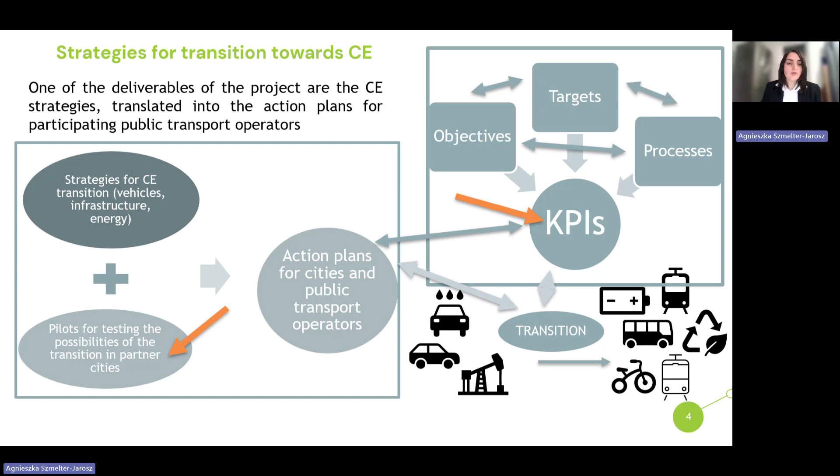However, that's not the case of our pilot specifically, so I will jump into the next part. We wanted to analyze a transport corridor, and in our case, in PKA Gdynia, there was only one operator operating within this transport corridor.

However, we have a few public transport operators in Gdynia. That is why we wanted to analyze if only one transport mode would be the best solution for a specific transport corridor or not. Regarding our other activities within the project, you may see on the slide that we had lots of different KPIs or data to be analyzed.

We analyzed data for the transport corridor operator, urban transport system, and the city itself. However, our pilot was focused only on the transport corridor and public transport operator, which was PKA Gdynia, but we also wanted to analyze other scenarios.

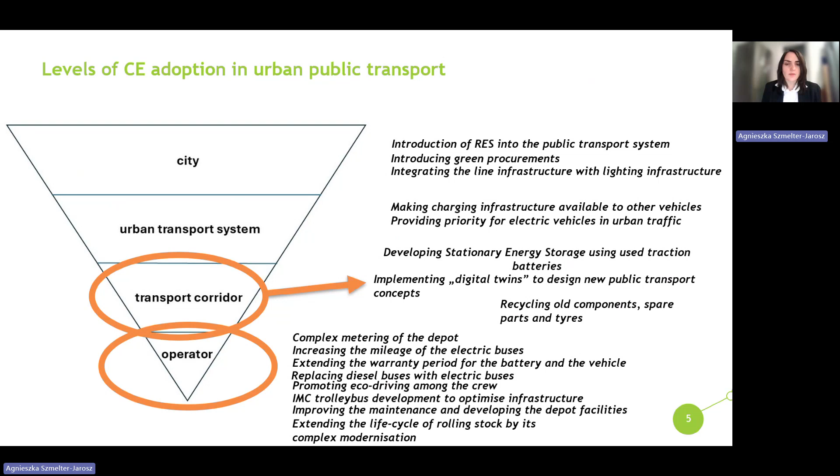We wanted to see if maybe another public transport operator could be engaged in operating within this transport corridor. Regarding public transport in Gdynia, there are some specific features for Gdynia as a city.

We have trolley buses in Gdynia in operation since 1943, and it's one of the oldest trolley bus systems in Europe. Also, we electrified some routes and the electrification process is ongoing since 2022. And also we wondered if we should electrify more routes or not, or if the trolley bus, in-motion charged bus or diesel bus would be the best solution for some routes we wanted to change and wanted to develop.

So to sum up the features for public transport in Gdynia, you can see on the slide that we have e-buses, we have trolley buses, and combustion engine buses, which are dominating right now, but we are trying to change that regarding our goals for electrification of public transport. And also, of course, they are aligned to European Commission requirements.

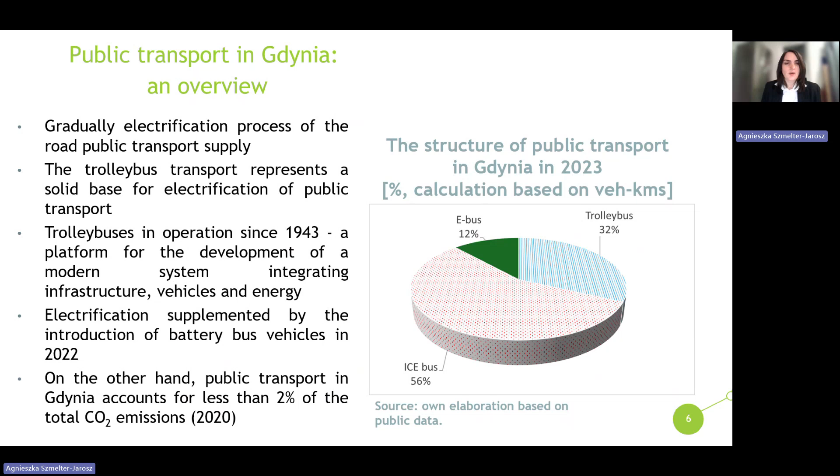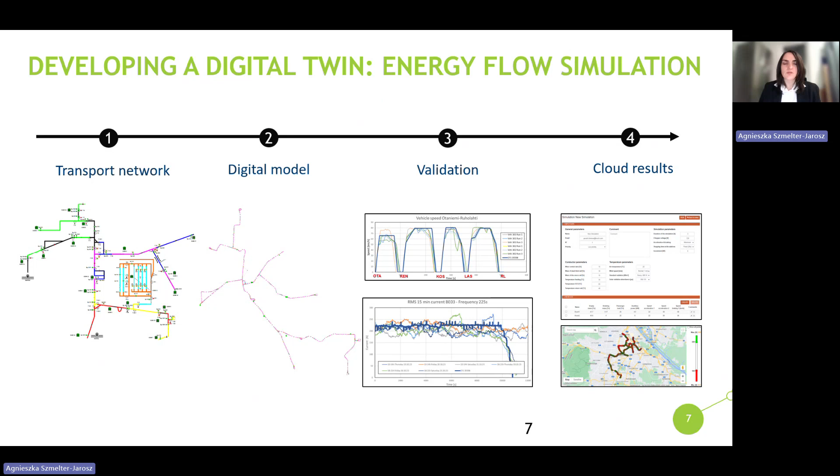So we developed the digital model, and then we validated different scenarios for the transport corridor planning, let's say, what kind of transport modes should be implemented within this transport corridor. And then, after analyzing really a big number of scenarios, we concluded what would be the best solution for particular routes within this transport corridor, since within this corridor PKA is operating a few separate routes. So energy flow simulation was made for the transport corridor, the Western Corridor, we called it. And you can see on the slide what was the part of the transport network which was under analysis.

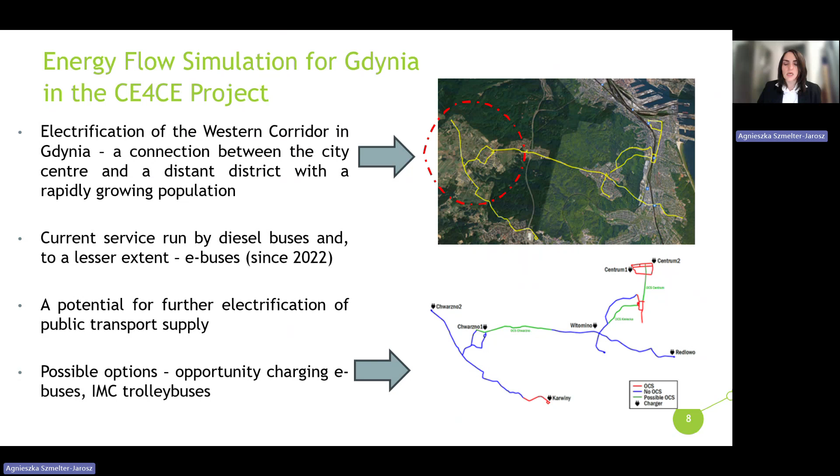As you can see as well, current service is run by diesel buses and to a lesser extent electric buses, and we wanted to see if we should develop it in some way, especially if in-motion charged buses are a sensible solution for this transport corridor, or we should mix it with diesel buses and electric buses in some combination, let's say. So the pilot started as the project started. In September 2023, a few months after starting the CE4CE project, we defined a collaborative framework, and also we determined what should be under analysis.

Then we narrowed it down to just the Western Corridor, as I said, since we wanted to make the pilot for just a selected few lines, few routes, and you can see these bus lines here on the slide. Later on, when these lines were selected, we developed the digital twin for the selected corridor and the routes within this corridor, and we analyzed, as I said, over 200 scenarios for changing this transport corridor in different variations. And also we analyzed scenarios for no traffic, high traffic, but these were only a few variables we wanted to incorporate in this analysis. So we analyzed many options, and you can see the main results on the bottom of the slide.

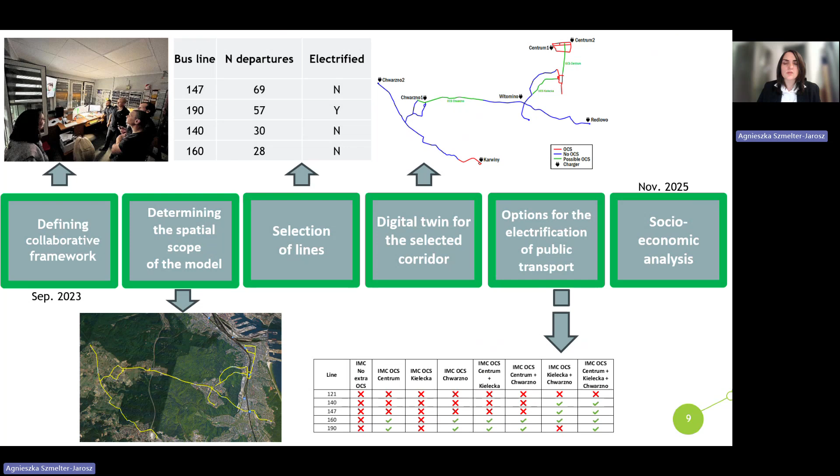And the last part of the analysis is socioeconomic analysis, which we are ending right now, also using a hackathon with students and experts to help us validate the pilot results, because of course the pilot results are very reliable, but as you know, we have to also incorporate some socioeconomic analysis to validate these results, if they are sensible in our situation or not.

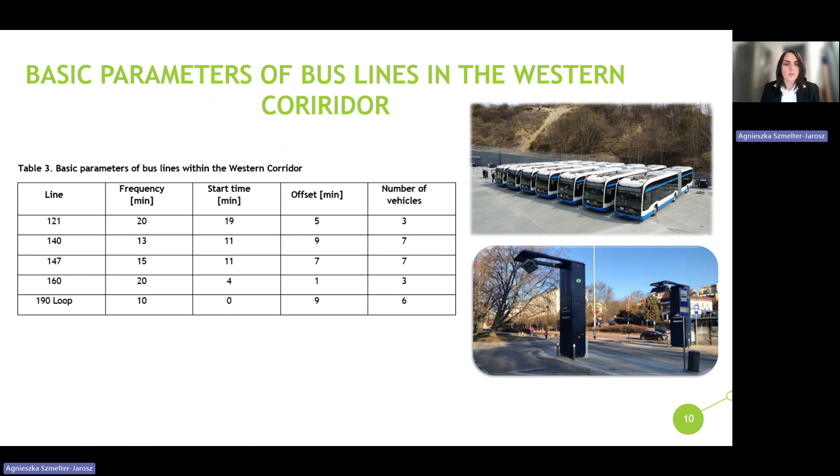We analyzed these few routes for the Western Corridor, including their frequency, start time, offset, number of vehicles operating, but also within the different scenarios we developed, we changed numbers from this very primary table in order to see if something will change or not regarding the real-life data we had at the very beginning of our pilot. So we assumed that some variables will have some specific values.

As you can see on the slide, this is just some assumption we made within our analysis. However, as I said, many scenarios were developed, and for sure we will deliver also a scientific publication regarding the results and summing up the results for this very vast analysis.

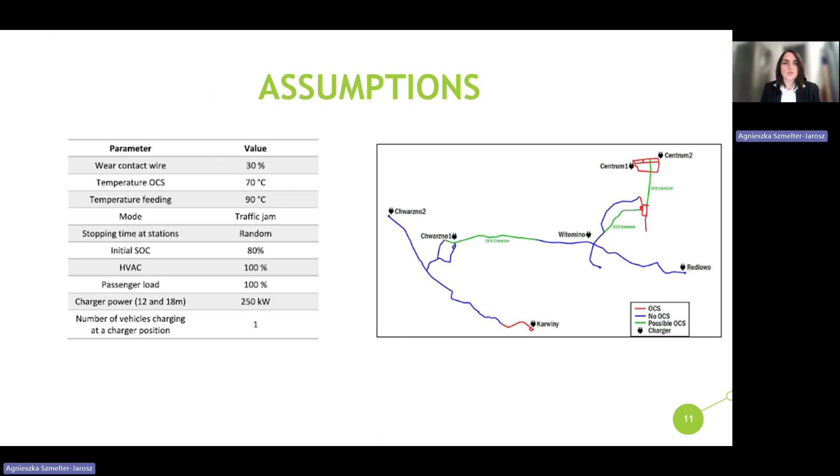So we assumed some values for parameters such as contact wire, temperatures, modes, stopping times at stations, what was the passenger load, charger power, and number of vehicles charging at the charger positions. Also, we analyzed the current situation of charging stations within the city, and also, of course, potential situations, so situating new chargers within some locations within the Western Corridor.

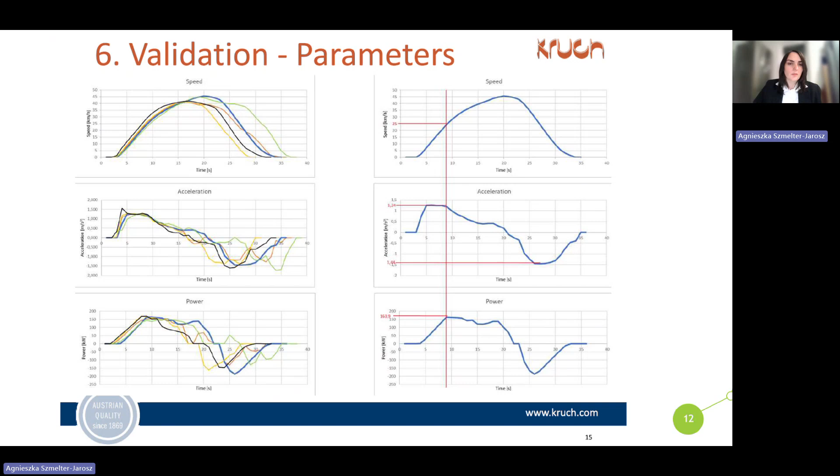On this slide, you can see a part of the final analysis of our partner, Kruch Railway Innovations. This was only a part of the analysis for different scenarios, and for some situations we assumed traffic or no traffic, with frequency of 7 minutes or 15 minutes of operating on specific routes. So we had to analyze a few types of charging and few types of vehicles operating on specific routes.

So we had to analyze the situation for batteries, so how often we should change batteries within some lifetime of the vehicle. We analyzed battery costs and battery lifetime, battery degradation regarding stationary charging, opportunity charging, in motion charging, overnight charging, etc. So we had to analyze lots of different scenarios and combinations of vehicles on specific routes.

Also, we had to analyze the situation regarding frequency of using vehicles and frequency of operating on specific routes for these few lines I mentioned before, and you could see on the slide. So we had some trade-off appearing in here, comparing costs of infrastructure and costs of batteries and vehicles and energy. You will see on the further slides some results for this analysis.

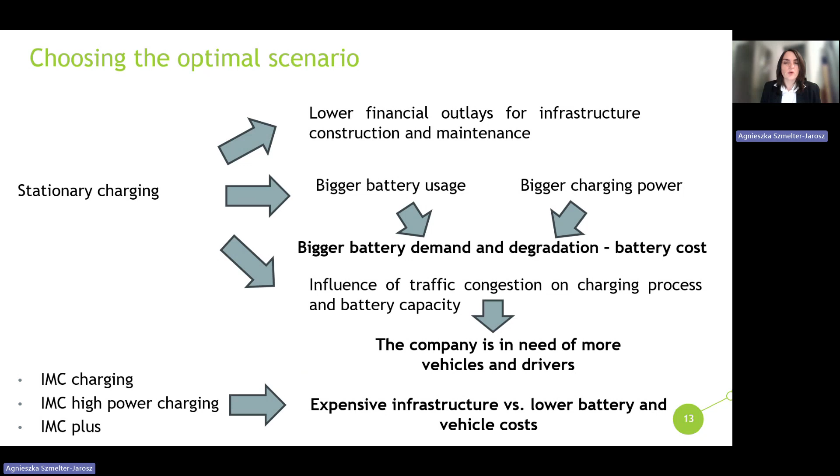It is one of the most probable scenarios we analyzed within our pilot, because we know that the congestion is appearing specifically in some hours within the daily cycle of operating on specific routes, especially mornings and afternoon. So we wanted to analyze a scenario very similar to reality. That is why 7 minutes frequency and congestion was one of the most probable ones we wanted to analyze and incorporate in the final results presented in our deliverables.

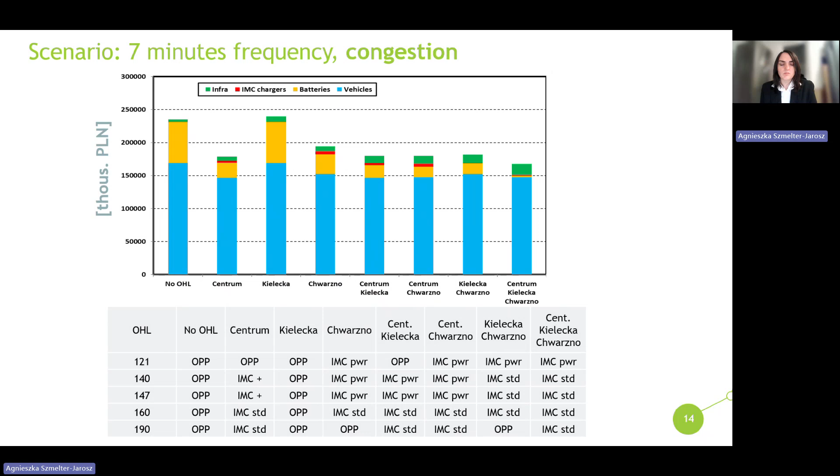So as I said, we analyzed many scenarios in our analysis, and we had to make some assumptions regarding what we exactly want to optimize, because as you probably know from some econometric analysis and statistic analysis, always one variable is the dominating variable to be optimized in every simulation. So we assumed minimal costs of particular variants regarding frequency and traffic conditions for the Western Corridor, and analyzed different frequencies and different combinations of vehicles on the route.

And also two options, so electric bus and in-motion charged bus. And we analyzed what are the costs of every option, and also analyzed these costs regarding energy, regarding vehicles, and regarding using batteries. Also regarding batteries, we assumed replacing batteries 2 times within the life cycle of the vehicle. However, we are aware that it can be the other way, so not necessarily 2 times they should be replaced, maybe 1 time within the life cycle.

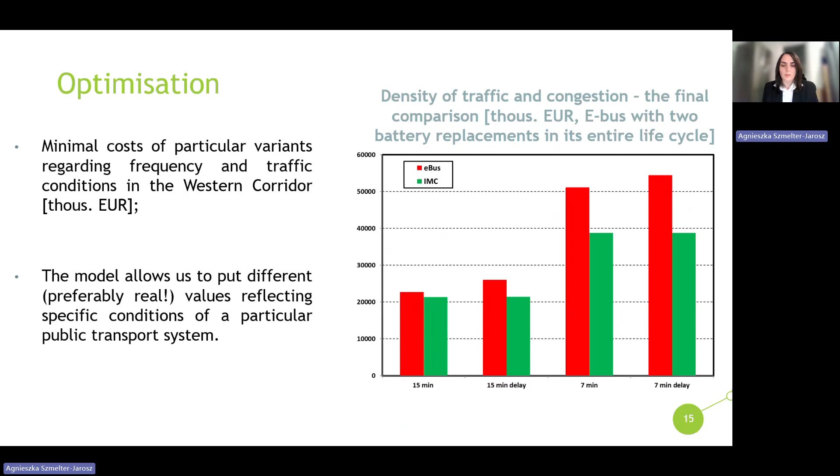So in fact, our pilot was focused on simulating different scenarios, and what you can see on the slide is one of the probable scenarios which may be observed in future in reality. However, our pilot was focused on simulations, and we wanted to train the model regarding the data we have and regarding the objectives we want to reach or targets to be met in the future.

So that is why we assumed many scenarios, and of course they have different probabilities to be observed in reality and in future. However, what we wanted to present to the wider audience was that digital twin is a very good solution for the decision-making process for a public transport operator, not only for 1 route, but for the whole corridor or combination of routes in some geographical area within the city.

And also we wanted to train and then later on share with other public transport operators how to make a digital twin, if it's difficult, if it's not difficult, how long it takes to gather all the data, what data should be collected by the public transport operator to prepare good analysis with the use of the digital twin.

And the digital twin itself, made together by University of Gdańsk, by PKT and Kruch, showed that this kind of decision-making process and the tool as a digital twin is the tool for enabling and supporting decision-making. This is really a good solution for public transport operators, since you are more than sure that your decision is good regarding planning using specific kinds of vehicles on specific routes.